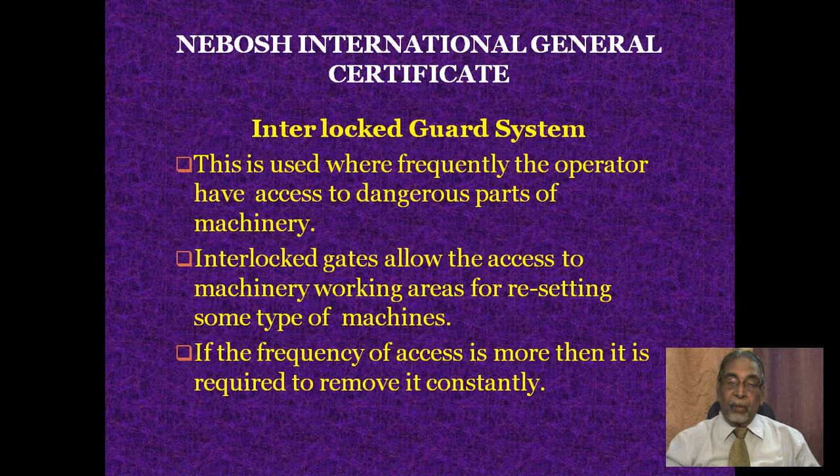Another type of guard is the interlock guard system. This is used where the operator frequently has access to dangerous parts of a machinery. Interlocked gates allow access to machinery working areas for resetting some type of machines. If the frequency of access is more, then it is required to remove it constantly.

Interlocking guard system consists of a secure safety system. This links the primary guard opening to the opening of a second safety device, or to the complete stoppage of the machine. These are the safest devices by which safe working access is allowed to the machine operations. This system works as the best protection system.

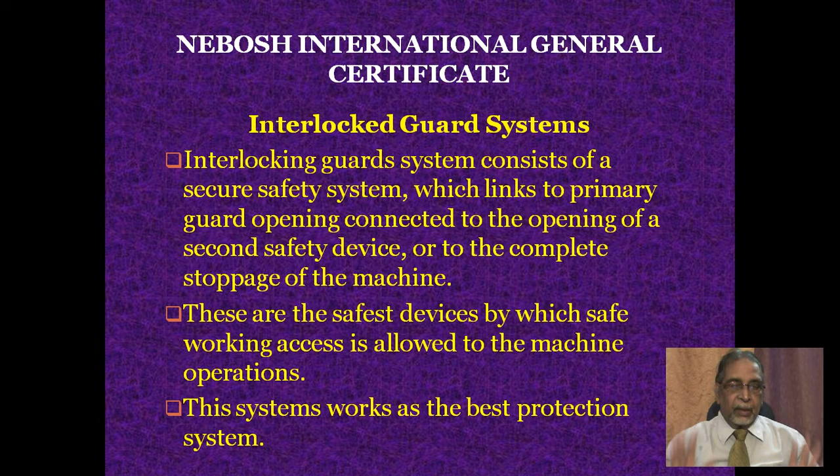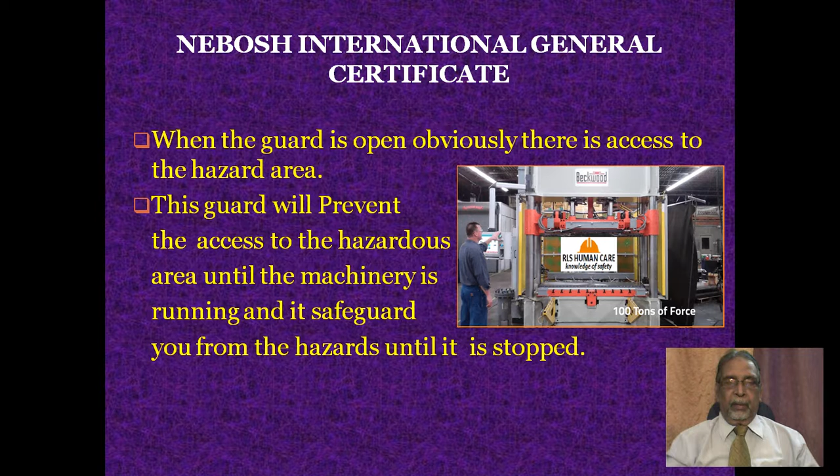When the guard is open, obviously there is access to the hazard area. You can see the diagram of the interlock system with the machine. This guard will prevent access to the hazard area until the machinery is running, and it safeguards you from the hazard until it is stopped.

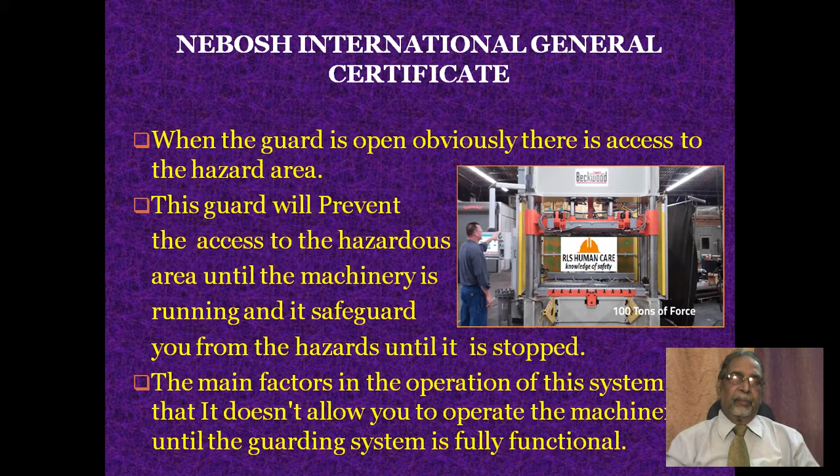The main factor in the operation of this system is that it doesn't allow you to operate the machine until the guard system is fully functional. In the event the interlock system fails, the machinery gets shut off, but the guard remains in place and the hazard also remains in its place. But nobody is going to get harmed.

The interlocking system is very difficult to fail. The interlock system operates by linking to the power supply of the machine. You can only remove this interlock by cutting it off, with the guard in open position.

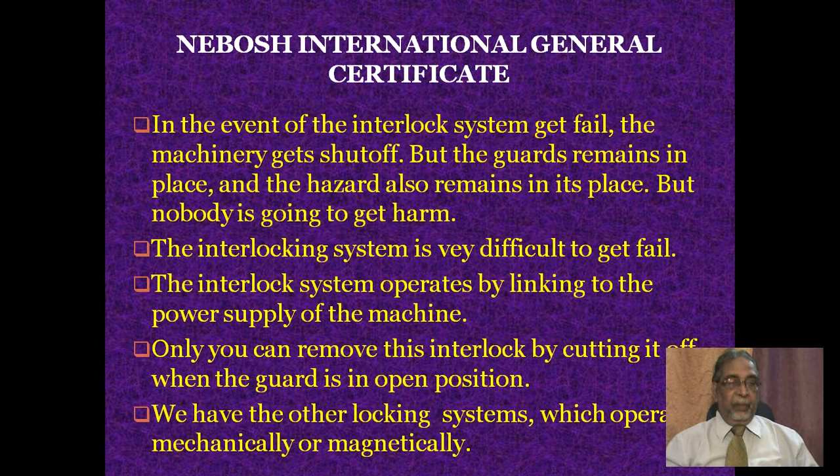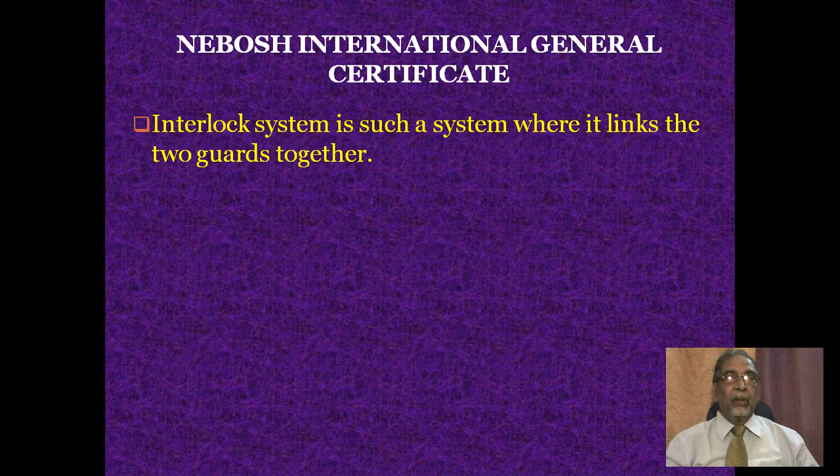We have another locking system which operates mechanically or magnetically. The interlock system is such a system where it links two guards together. The opening of the first guard must automatically bring the second guard into operation.

When you need access to replace a workpiece in the machine, the action of opening the guard will stop the cutting operation and slide the cutter back away from the cutting access area, and a second guard will cover it. The primary guard never opens until the second safety guard device is in its exact place.

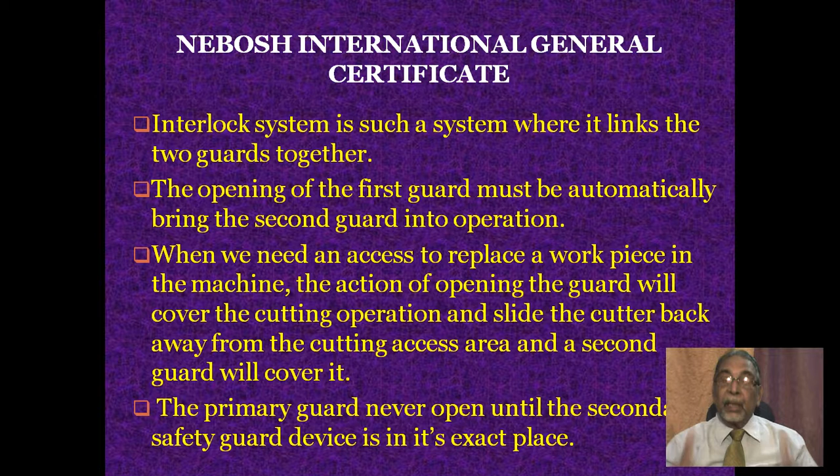Trip devices. Now we will see the different types of trip devices. There are some operations which make it impossible to fit either a fixed guard or an interlock.

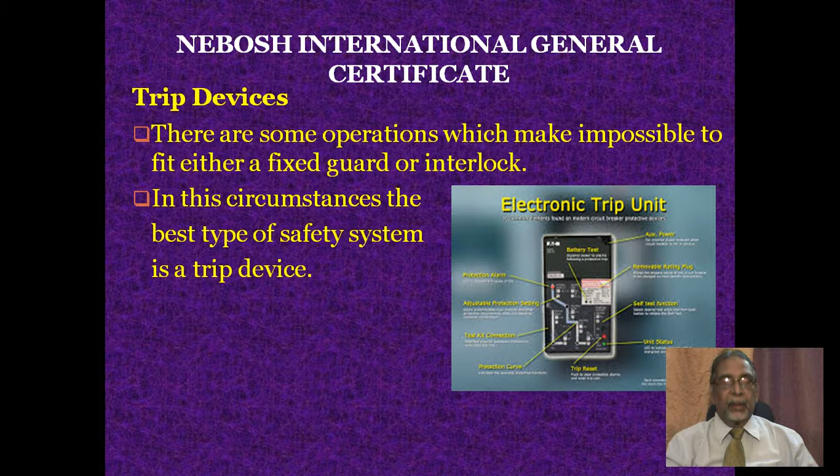You are seeing a diagram of the electronic trip unit. In these circumstances, the best type of safety system is a trip device. It is defined as a guard which stops or reverses the motion of the machine when a person enters the hazard area.

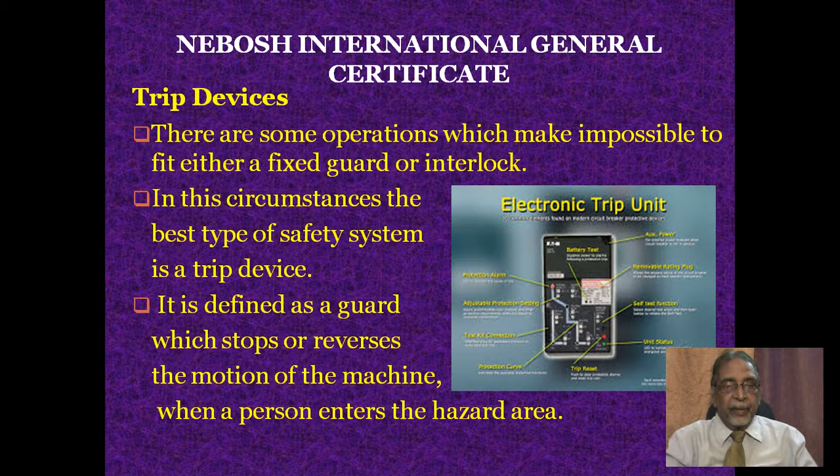The trip device gets operated when a person enters the risk area, or if an entanglement occurs into the moving parts. The effectiveness of any trip device depends on the efficiency of the stopping device. So these devices are considered top priority.

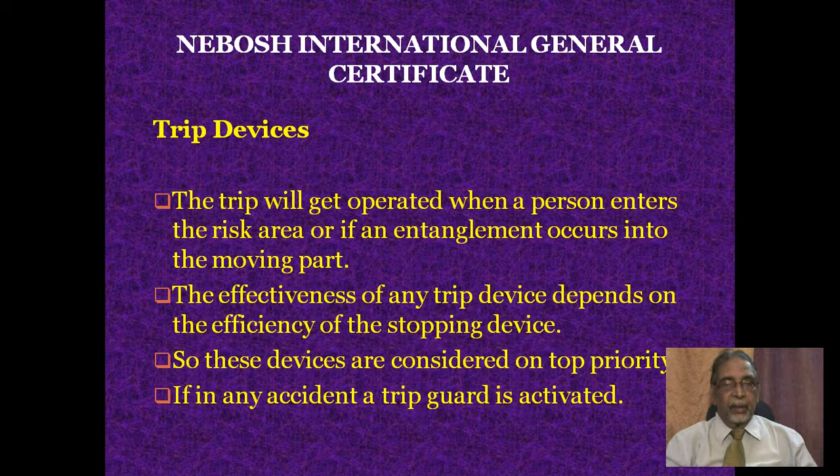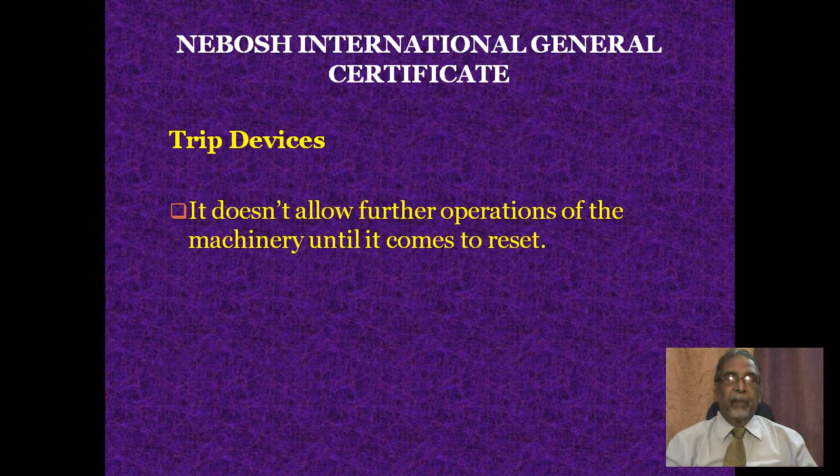If in any accident a trip guard is activated, the trip device doesn't allow further operation of the machinery until it comes to rest. It is important that a test circuit should be designed to inspect the tripping action of the machine.

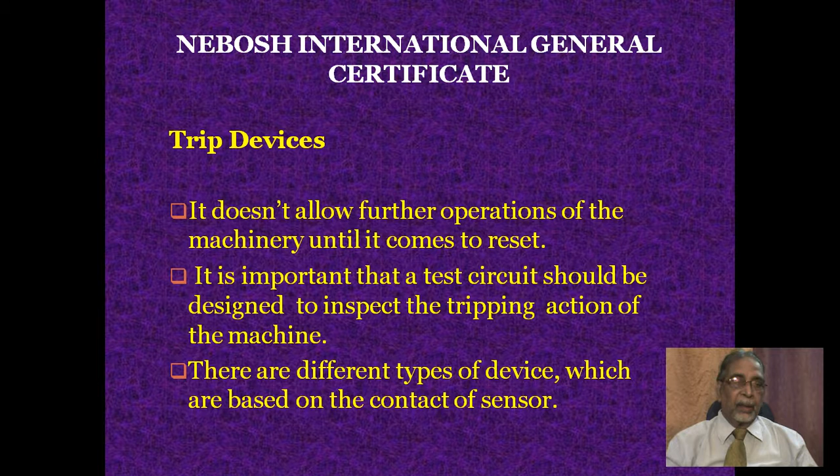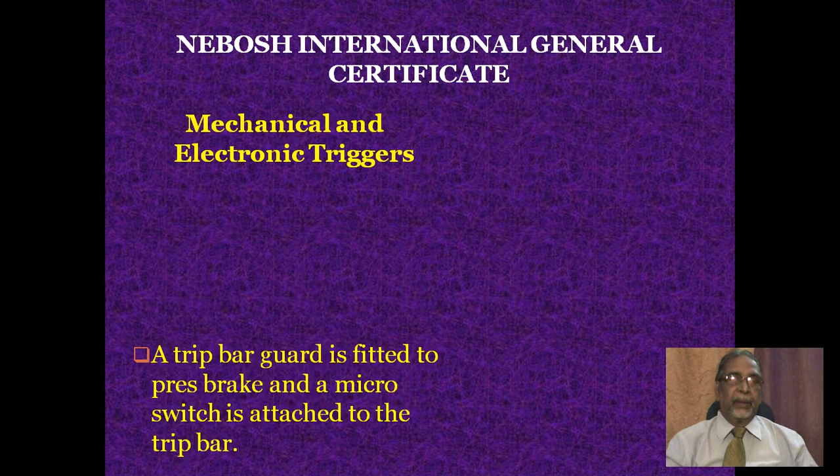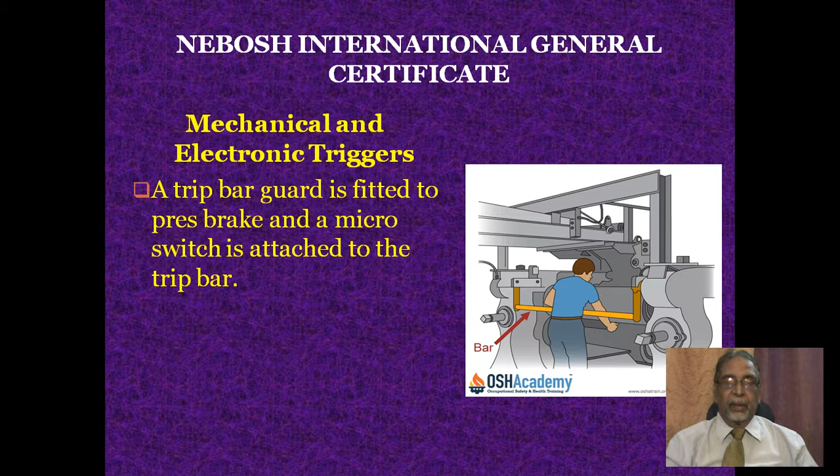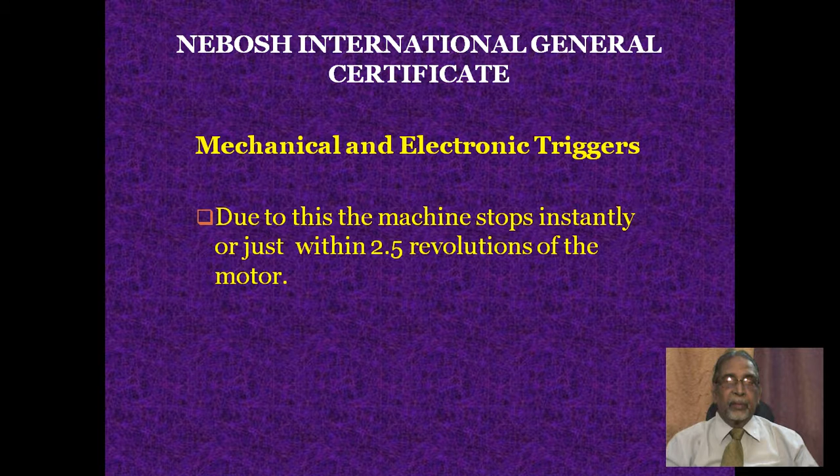If it is slightly displaced, the alternating current supply gets cut off and direct current is injected into the motor. Due to this action of displacement from AC to DC, the machine stops instantly, within 2.5 revolutions of the motor. If a person gets entangled in the machine, the trip bar is displaced and the power to the machine gets cut off.

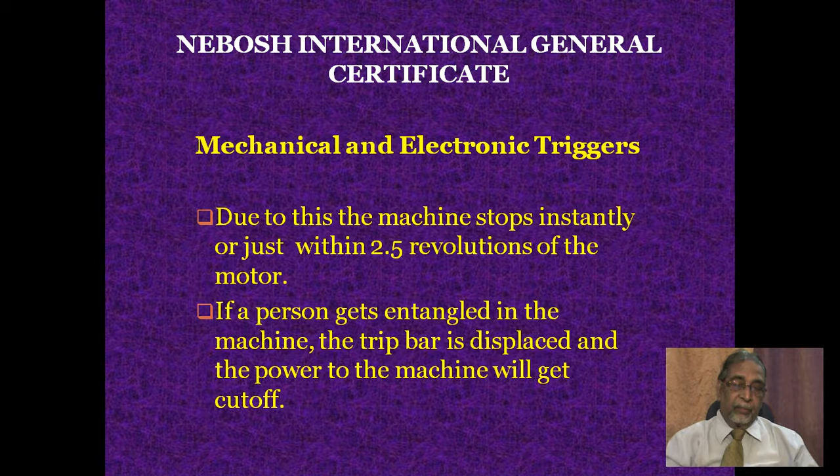This type of device may not prevent contact, but only operates once a contact is made. But this serves to reduce the injurious effect of contact.

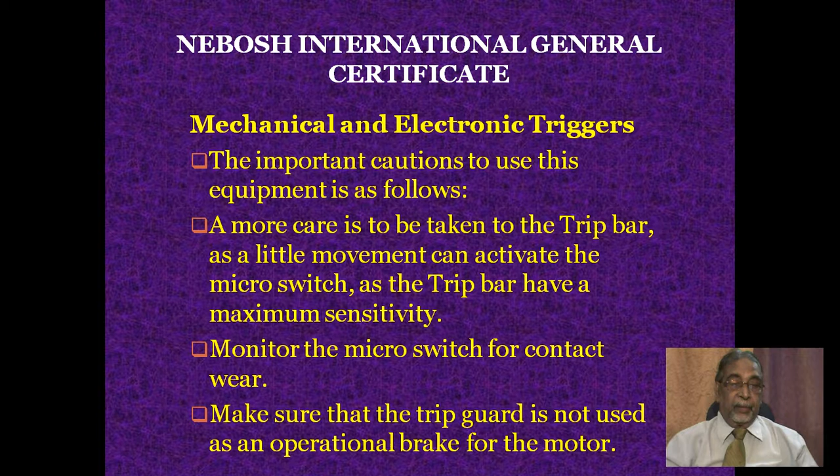The important cautions to use this equipment are as follows. More care is to be taken with the trip bar, as a little movement can activate the micro switch. The trip bar has maximum sensitivity. Monitor the micro switch for contact wear. Make sure the trip guard is not used as an operational brake for the motor.

Photoelectric guards. These are used for press brakes, guillotines and hydraulic presses. You are seeing a photograph of a press attached with a photoelectric guard. The guard is operated by creating a curtain of light rays across the hazard area.

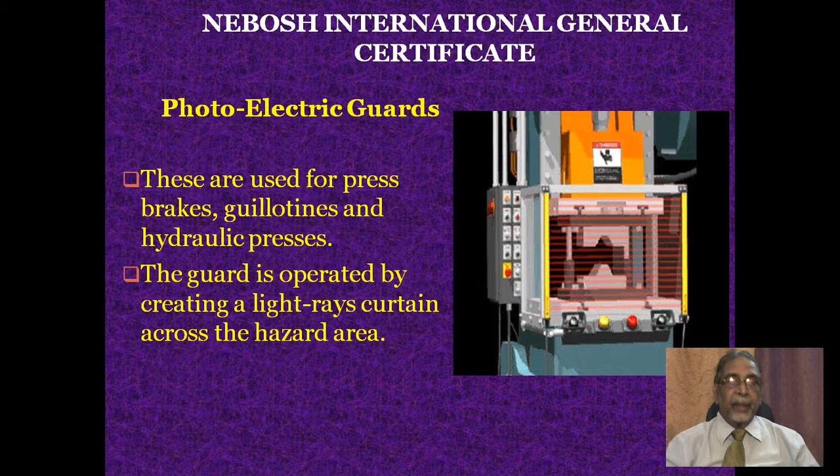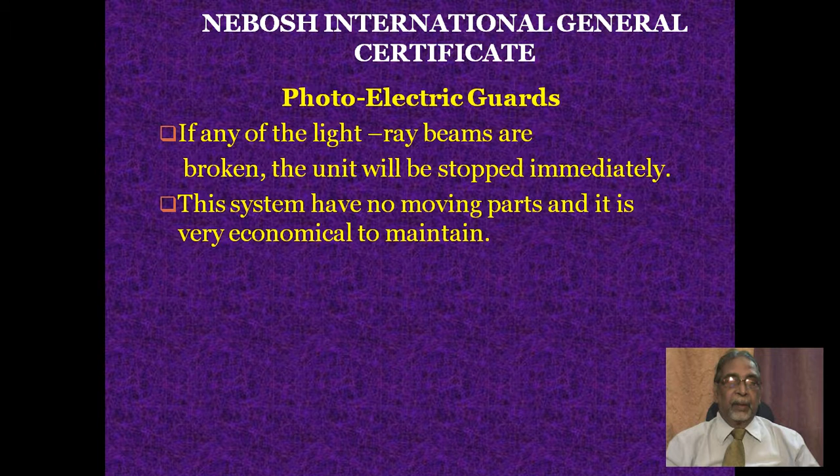If any of the light ray beams are broken or disturbed, the unit will stop immediately. The system has no moving parts and is very economical to maintain. The light screen is incorporated into a self-checking system after each operation of the machine, confirming that the equipment is working in good condition with no possibility of failure.

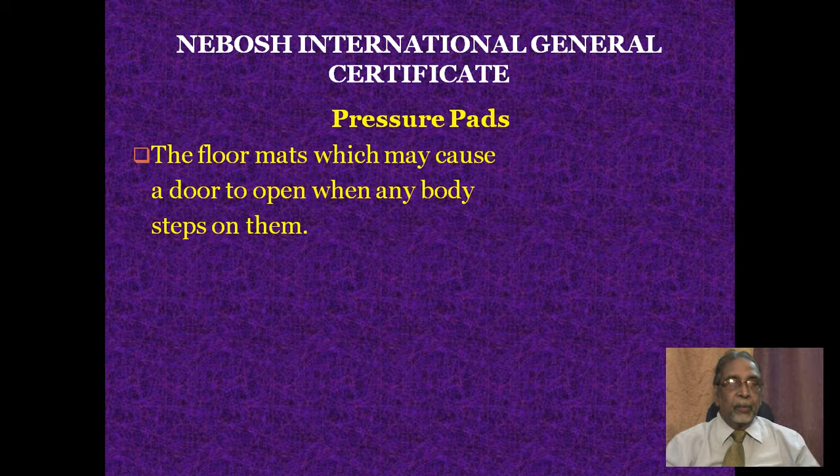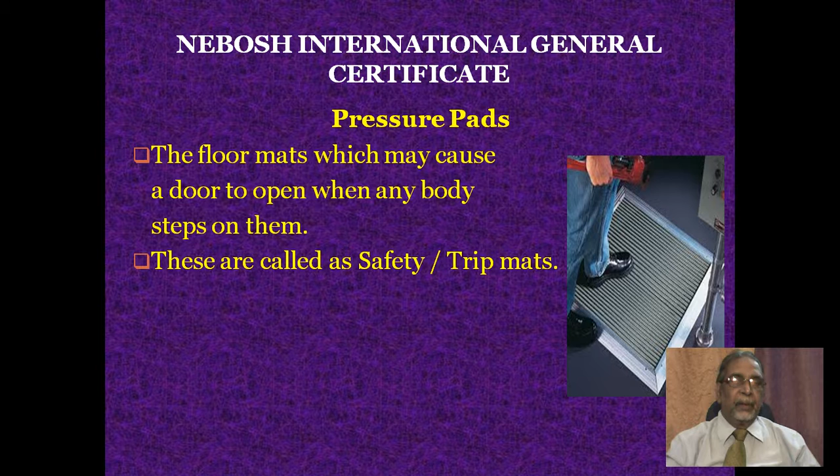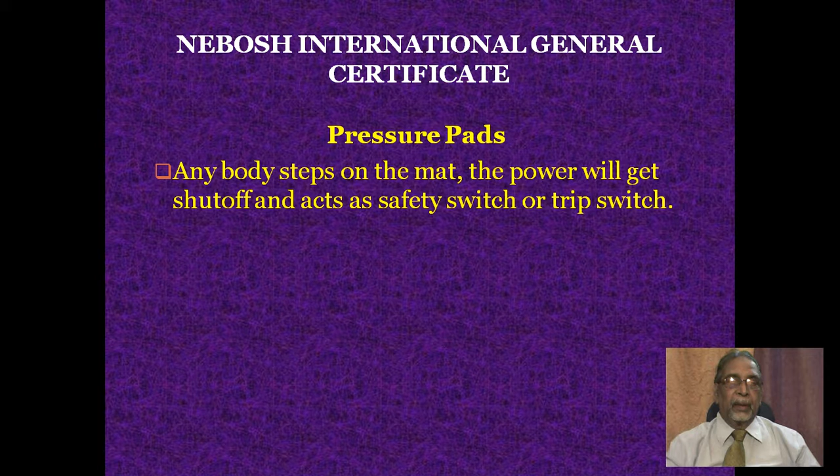This is another device called pressure pads, or floor mats, which may cause a door to open when anybody steps on them. You are seeing a photograph of a pressure pad at the right side. These are called safety or trip mats. They consist of pneumatic or low voltage electric contact circuits linked to the power circuit of the machine. When anybody steps on the mat, the power gets shut off, acting as a safety switch or trip switch.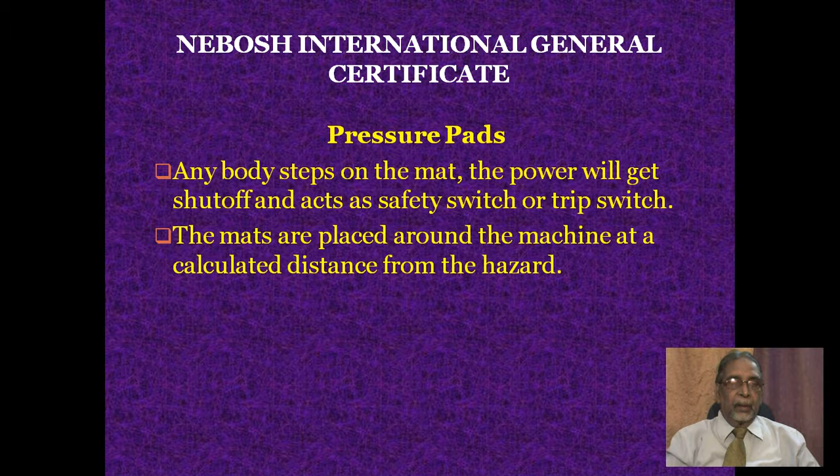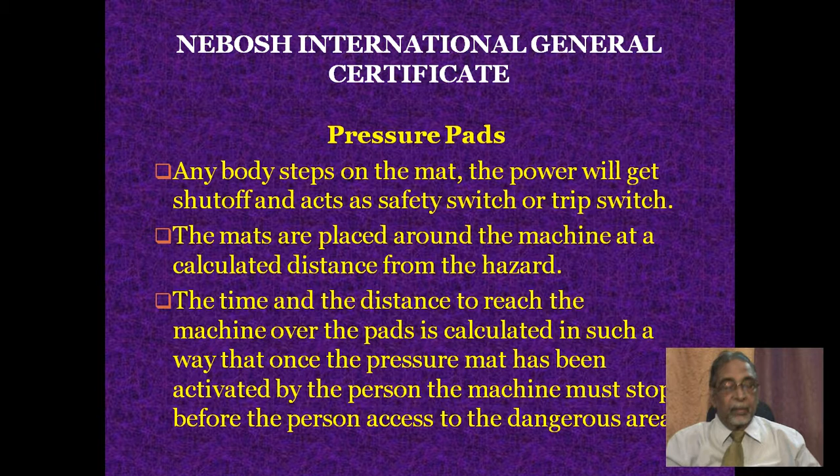The mats are placed around the machine at a calculated distance from the hazard. The time and distance to reach the machine over the pads is calculated so that once the pressure mat has been activated by the person, the machine must stop before the person accesses the dangerous area. The same principle is used in devices like safety edges and narrow strips fitted to sliding doors or machine parts which may close to trap a person. Circuits from the pressure strips can halt the closing movement or reverse it.

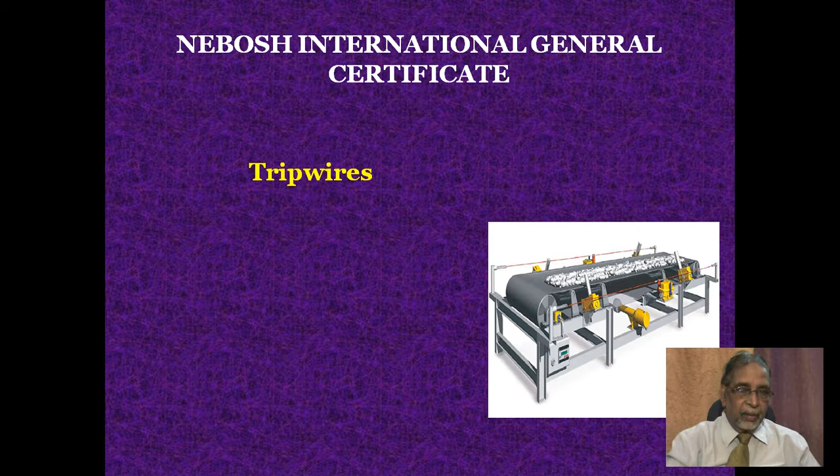Tripwires. This is another type of device used for safety. You are seeing a diagram at the right side where you can see a tripwire has been attached to a switch. Tripwires are more convenient to stop long conveyor belts, rope making and printing machines, and paper making machines.

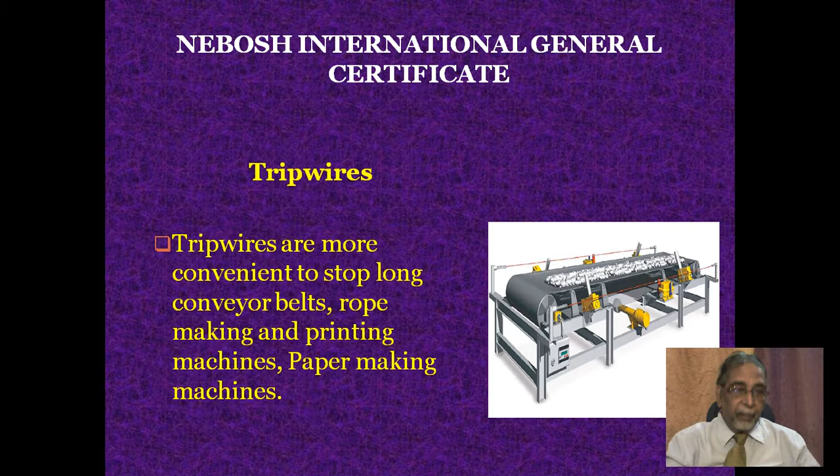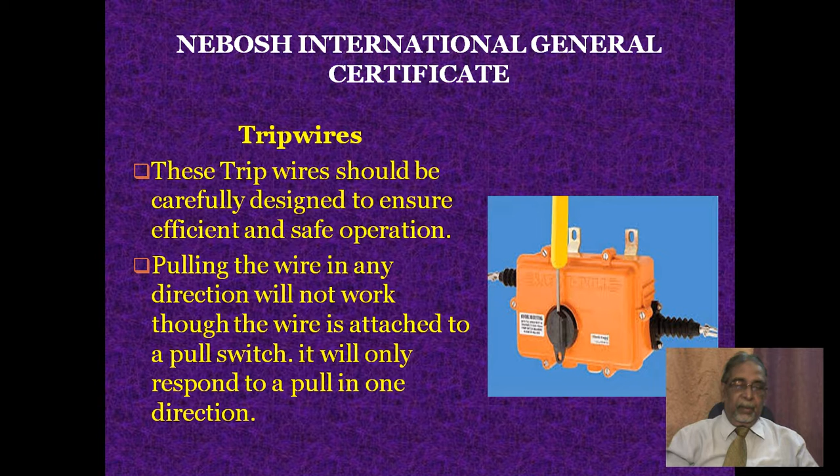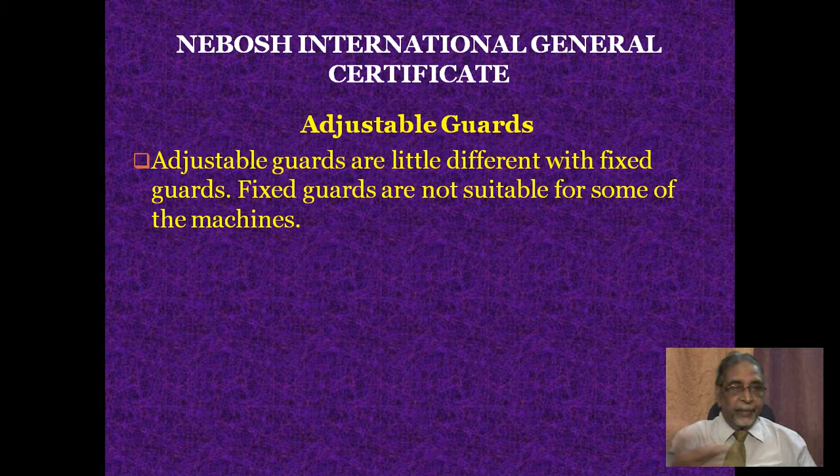Now we will go through adjustable guards. Adjustable guards are a little different from fixed guards. Fixed guards are not suitable for some machines, so as per the design of some machines, only adjustable guards are suitable. Otherwise, it is impracticable to prevent access to the dangerous parts. The cutter on a milling machine and the abrasive wheel on a surface grinder will have adjustable guards.

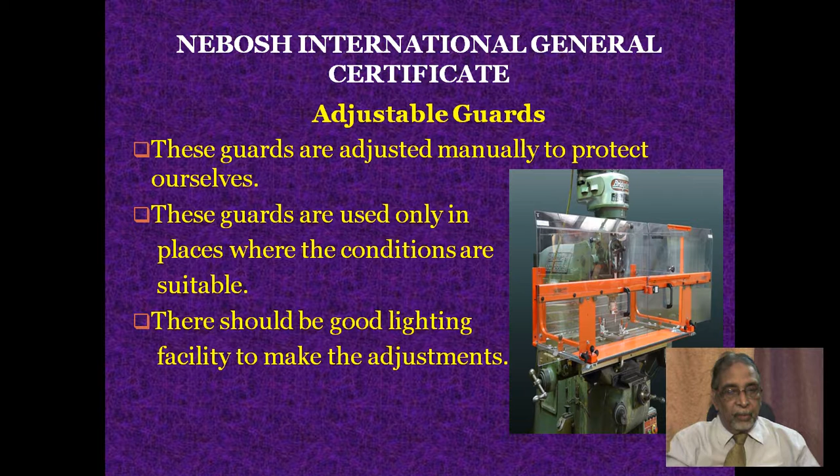These guards are adjusted manually to protect ourselves. You are seeing a photograph of a milling machine with an adjustable guard. These guards are used only in places where the conditions are suitable. There should be good lighting facility to make the adjustments, and adequate training should be given to the machine operator to work safely.

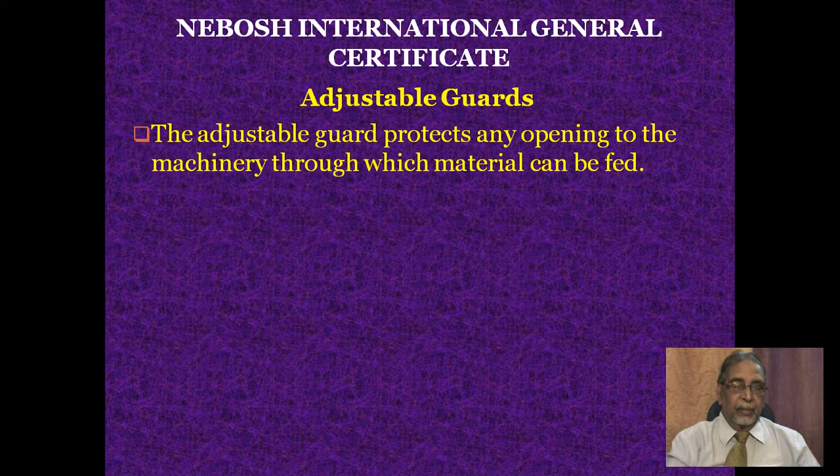The adjustable guard protects any opening to the machinery through which material can be fed. This opening can be adjusted to open and close as per our requirement size and as per the requirement of the job.

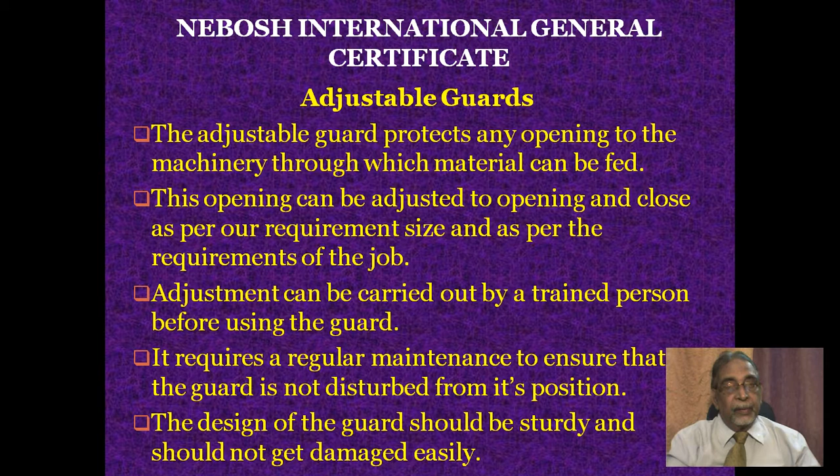Adjustment can be carried out by a trained person before using the guard. It requires regular maintenance to ensure that the guard is not disturbed from its position. The design of the guard should be sturdy and should not get damaged easily. Generally, these types of guards are used on woodworking machinery, lathes, milling machines, drills and grinders.

Machine operators prefer to have a clear view of the job during machine operations. Viewing windows of polycarbonate, perspex, or armored plate glasses are fixed to allow the operator's clear view. Some systems are made with telescopic fencing or a slotted movable casing to allow the view of the operator.

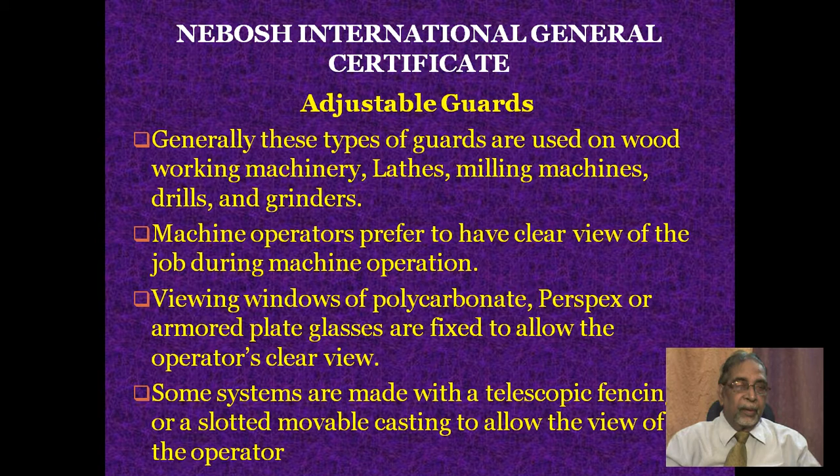This is a radial circular saw with adjustable guard. The cover is adjusted so that the height is large enough for the workpiece to be cut by the saw, while at the same time ensuring minimum exposure to the dangerous parts.

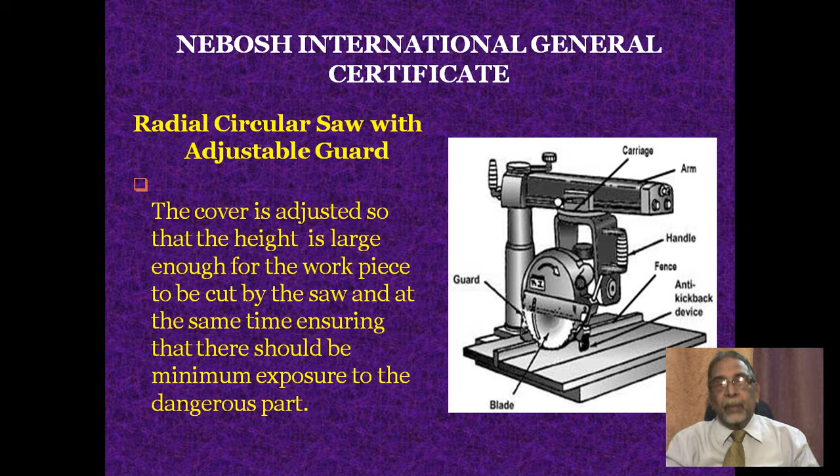This is a hinged lathe guard. A visible transparent cover over the cutting operations area allows the operator to view and control the operations. It is hinged at the top so that on completion of the operations, it can be lifted to get access to the workpiece.

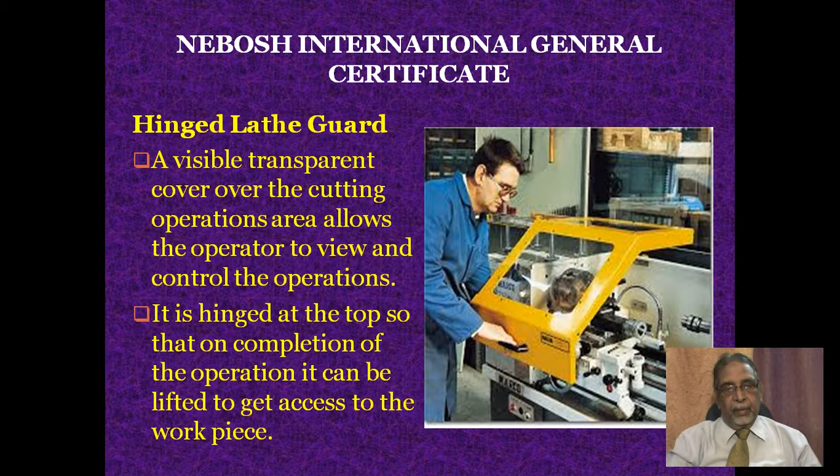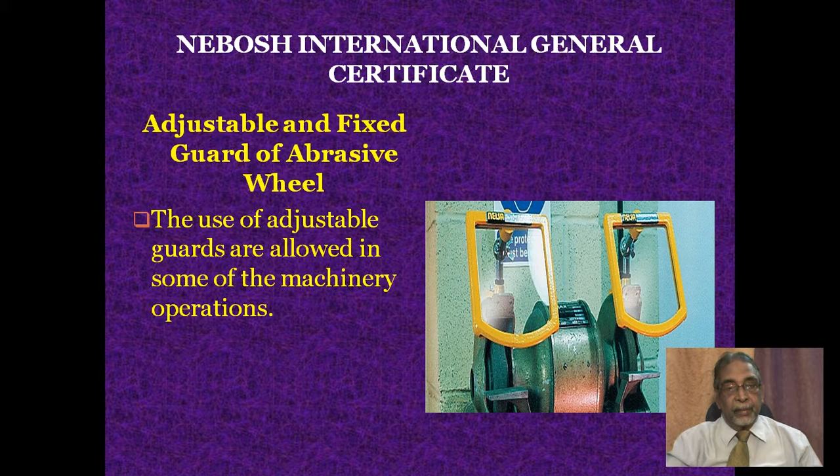This is an adjustable and fixed guard of an abrasive wheel. The use of adjustable guards is allowed in some machinery operations. The guards are adjusted by the operator but not automatically.

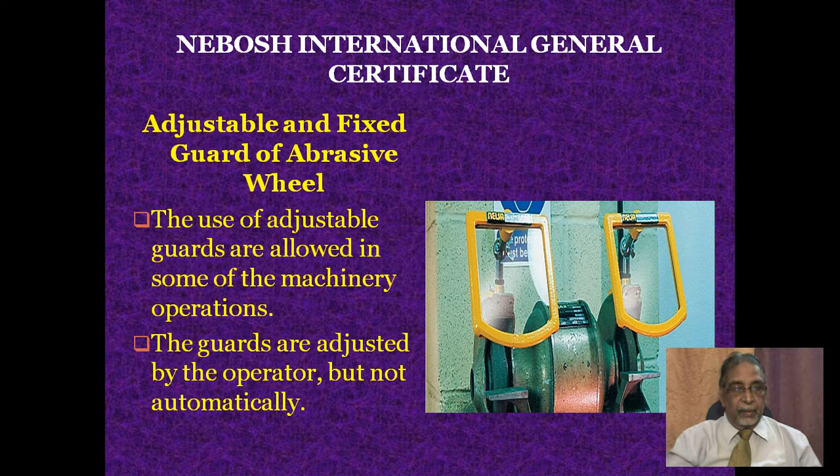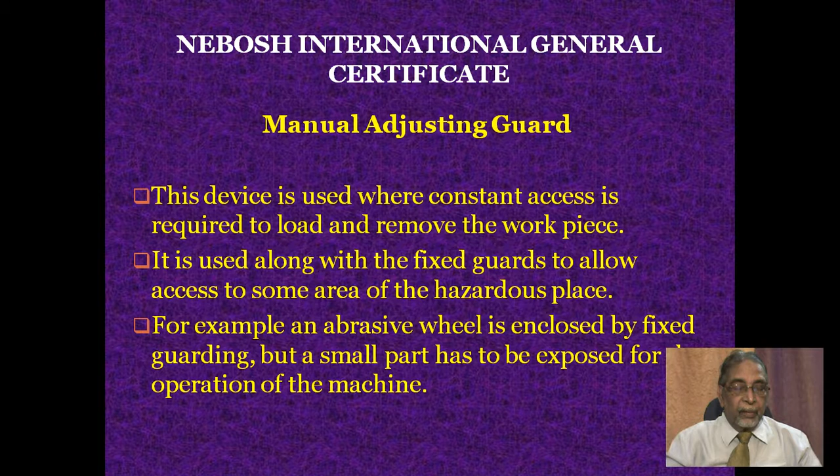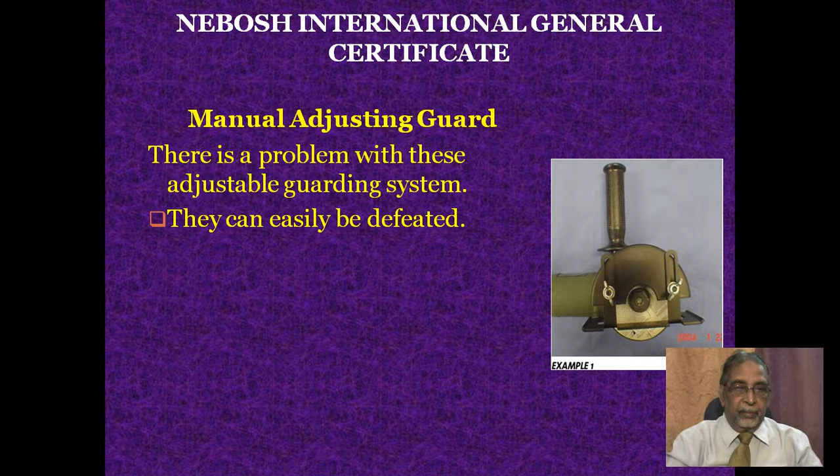There is a problem with the manual adjusting guards system. You can see a photograph of a grinding machine attached with an adjustable guard system. They can easily be defeated, as they depend upon the operator only. The operator should take more care about safety for himself and should be vigilant at all times while operating the machine.

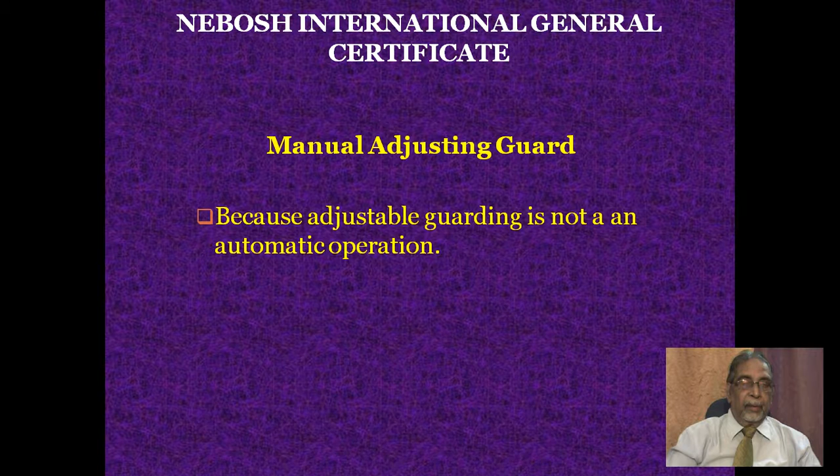Manual adjusting guard system is not an automatic operation system. A perfect suitable training should be given to the operator, and there should be strict supervision on him.

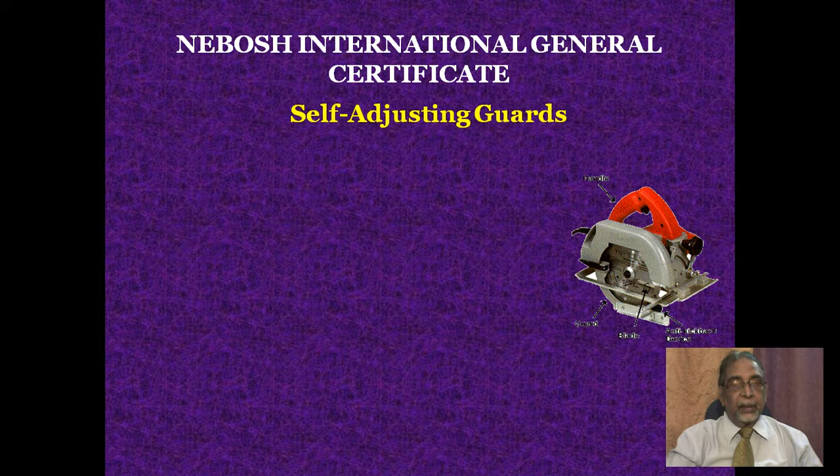This is a self-adjusting guard system. A self-adjusting guard gets adjusted itself to accommodate the passage of the material and control the sparks and broken material particles from striking the operator. At the beginning, the guard is open to accommodate the workpiece in position and adjusted to the safe closed position. After completion of the operation, it returns to the safe position.

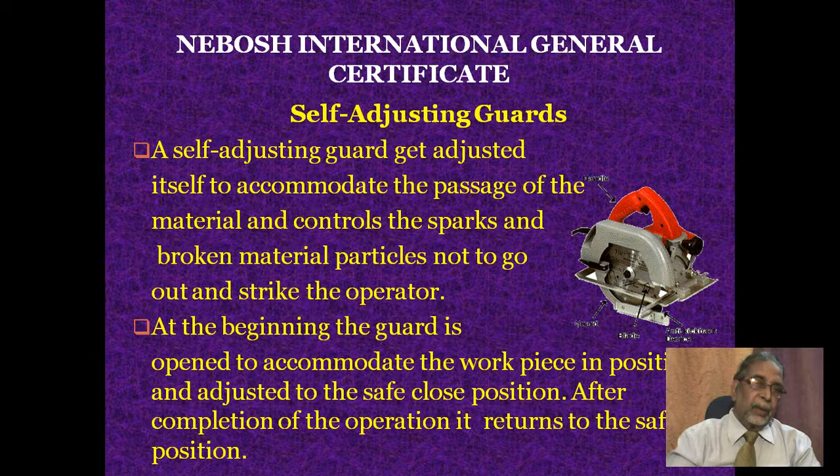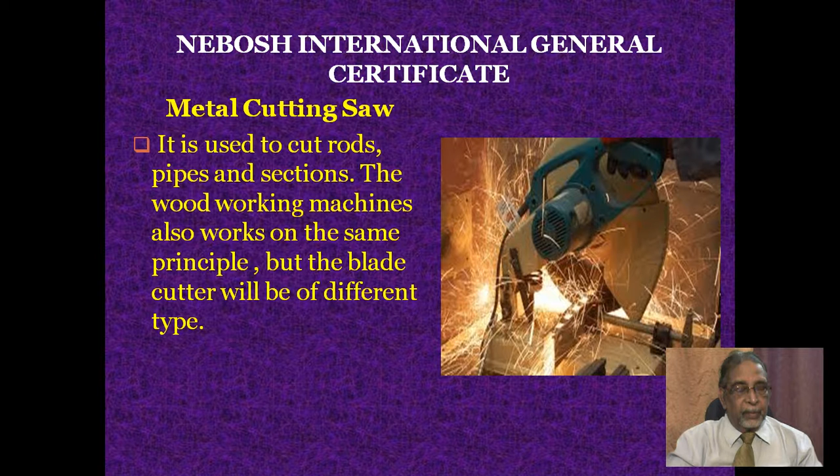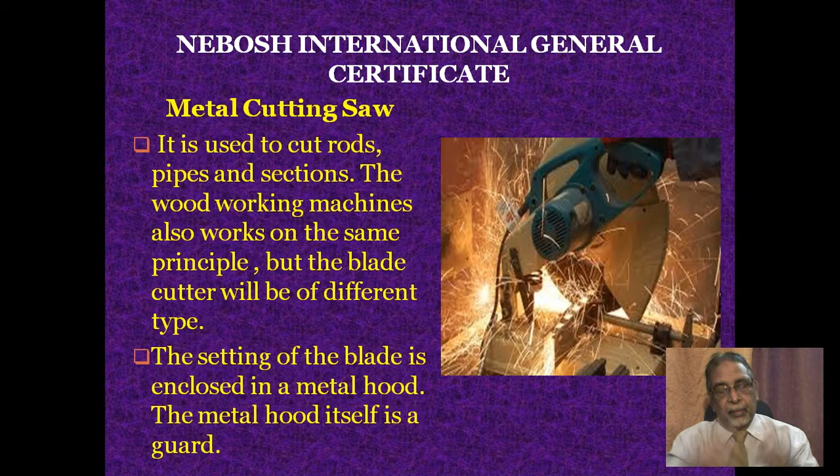This is a metal cutting saw. You can see the photograph of a metal cutting saw in action. It is used to cut rods, pipes and sections. The woodworking machine also works on the same principle, but the blade cutter will be of a different material type. The setting of the blade is enclosed in a metal hood. The metal hood itself is a guard. The blade and hood are fixed to an arm.

We can observe that no part of the blade is exposed because the self-adjusting guard is attached with a spring, which goes up by closing the job in the cutting position and comes down when we lift the blade.

Some of the machines have guards which come down and close the job during the cutting operation. This is due to gravity pressure. When the arm is pressed down for the cutting operation, first the guard comes in contact with the table of the machine or the job, and slowly as the blade moves down, the guard will also move to the up position.

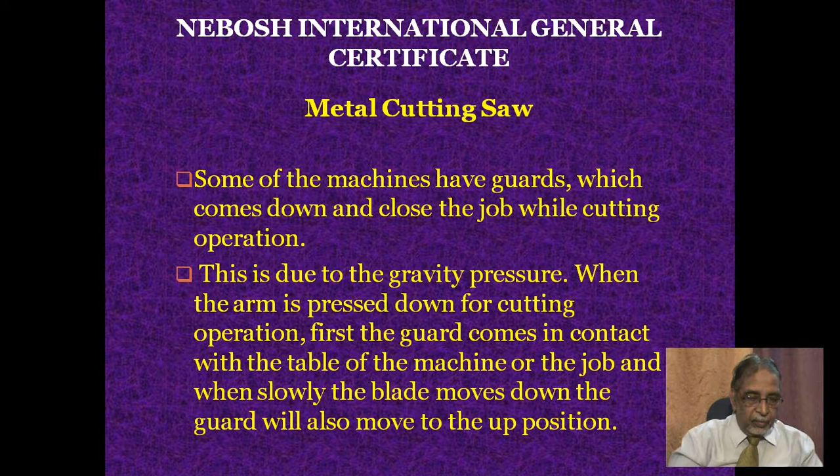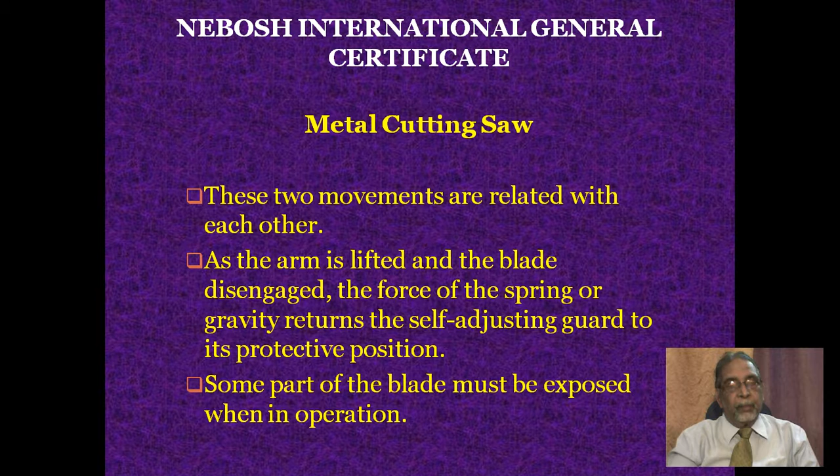These two movements are related with each other. Now the arm is lifted and the blade disengages. The force of the spring or gravity returns the self-adjusting guard to its protective position. Some part of the blade must be exposed when in operation.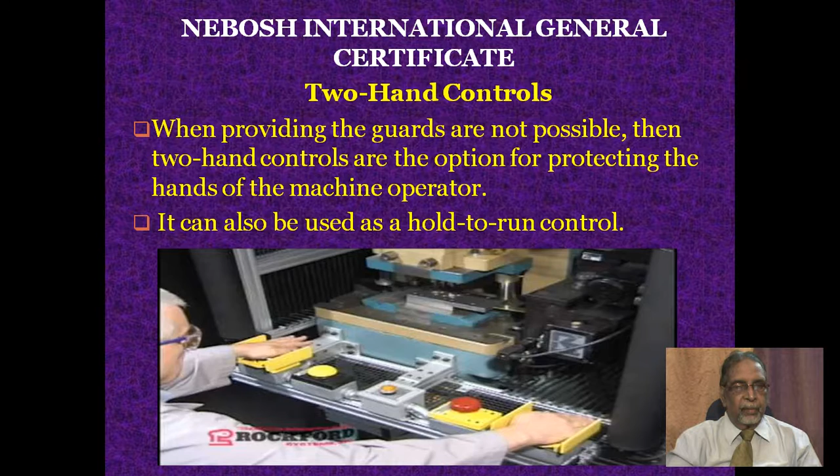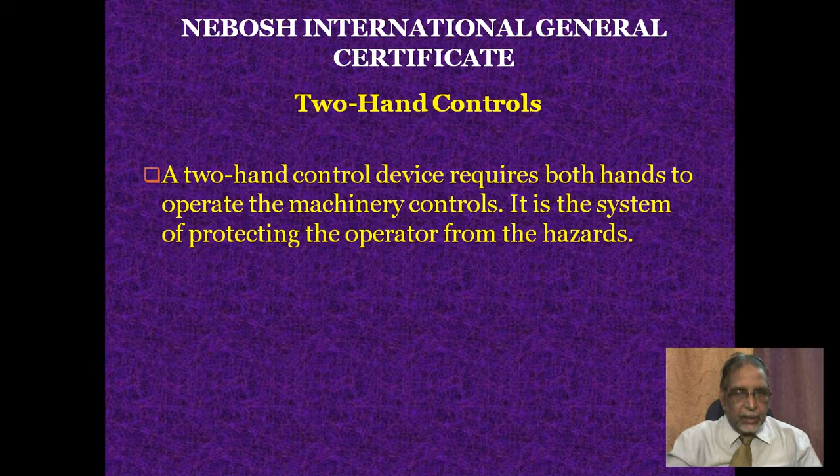A two-hand control device requires both hands to operate the machinery controls. It's a system of protecting the operator from hazards. This is a special type of design where hand controls should be placed and separated. It's only possible to set the dangerous parts in motion if the controls are operated within an approximate time of half a second of each other.

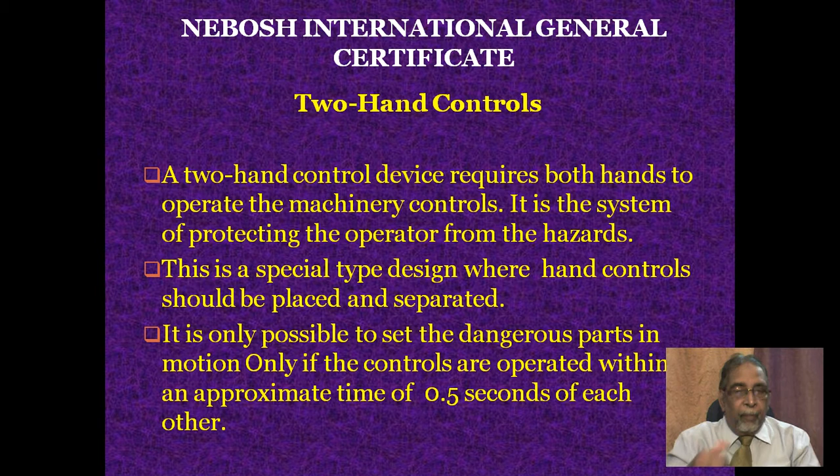If there is a danger from the movements of the parts, this should be stopped immediately or reversed. If there is still danger, one or both the controls are released. On releasing the control, the hand control should be installed at such a distance from the danger point that it should not be possible for the operator to reach the danger point before the motion of the dangerous part is stopped.

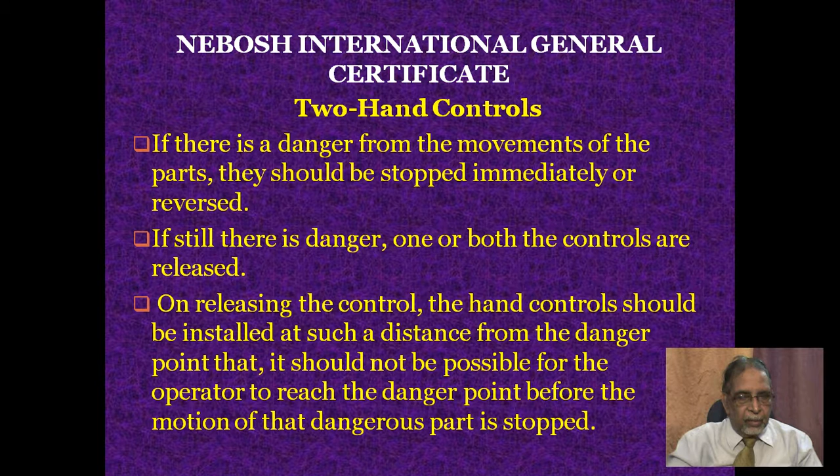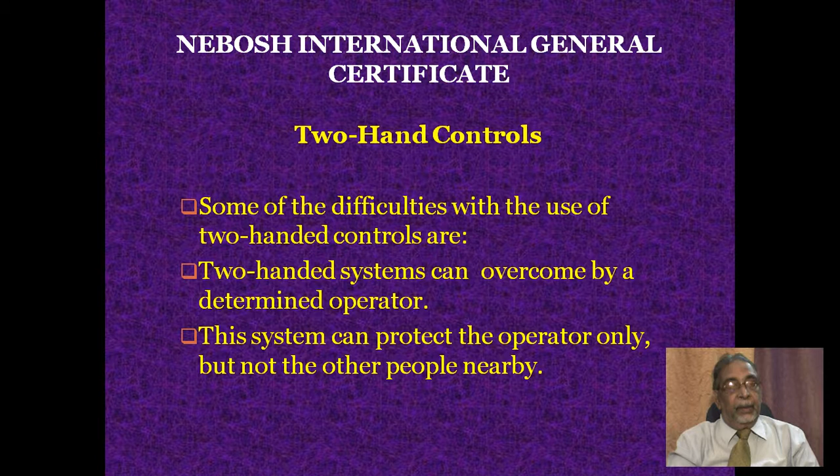Some of the difficulties with the use of two-hand controls are: the two-handed system can be overcome by a determined operator. This system can protect the operator only, but not other people nearby. So frequent maintenance is required for this two-hand control system. This system requires a complex mechanism if we want the machine to be more effective. In practice, this system of machine guarding is used very rarely in industry.

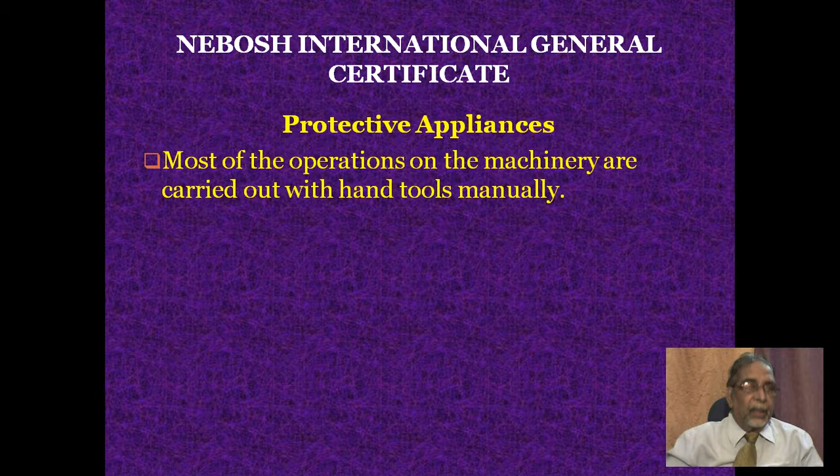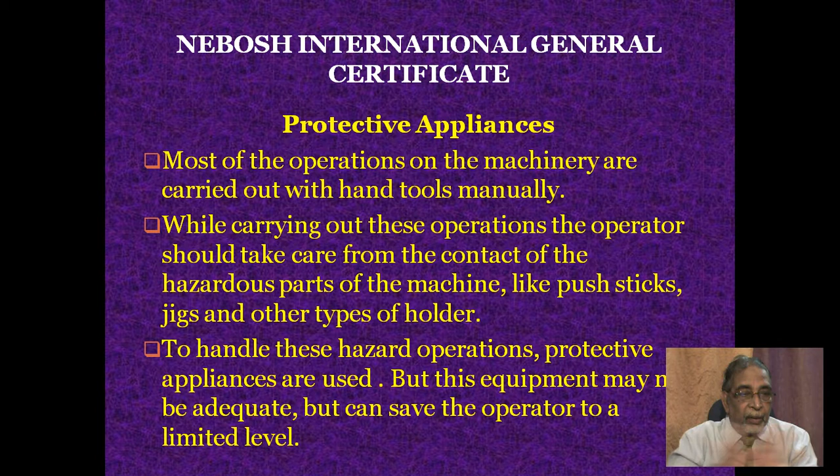Protective appliances. Most of the operations of the machinery are carried out with hand tools manually. While carrying out these operations, the operator should take care to avoid contact with the hazardous parts of the machine, using push sticks, jigs and other types of holders. To handle these hazardous operations, protective appliances are used, but this equipment may not be adequate and can save the operator only to a limited level.

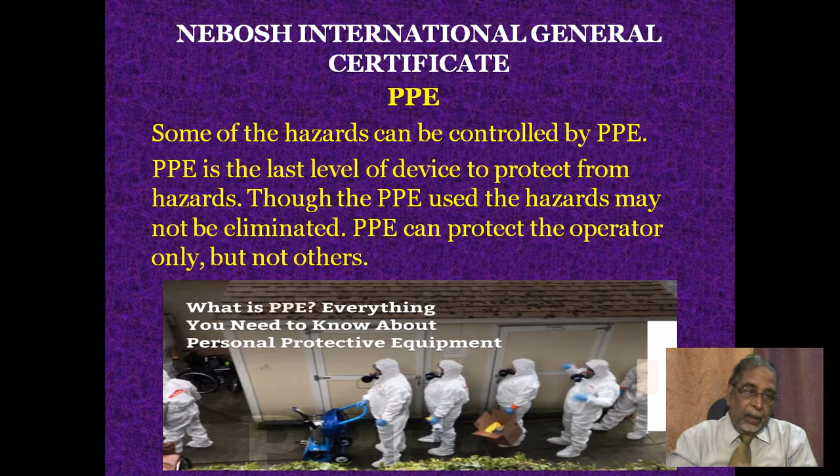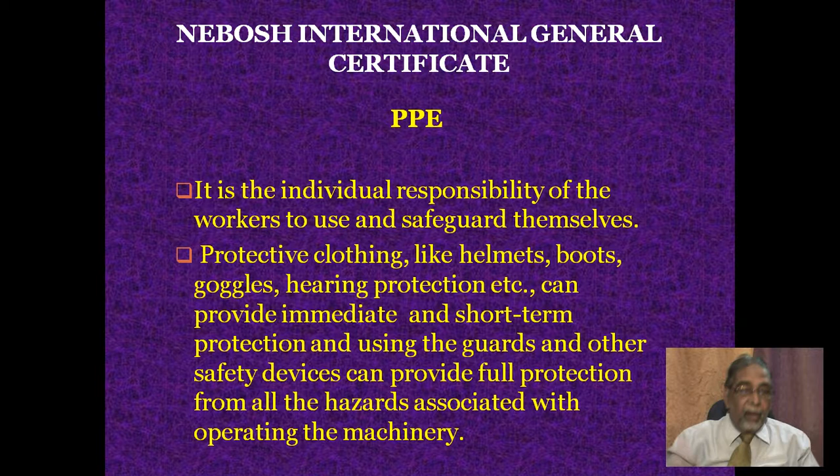It's the individual responsibility of the workers to use and safeguard themselves. Protective clothing like helmets, boots, goggles, hearing protection, etc. can provide immediate and short-term protection, while using guards and other safety devices can provide full protection from all the hazards associated with operating the machinery.

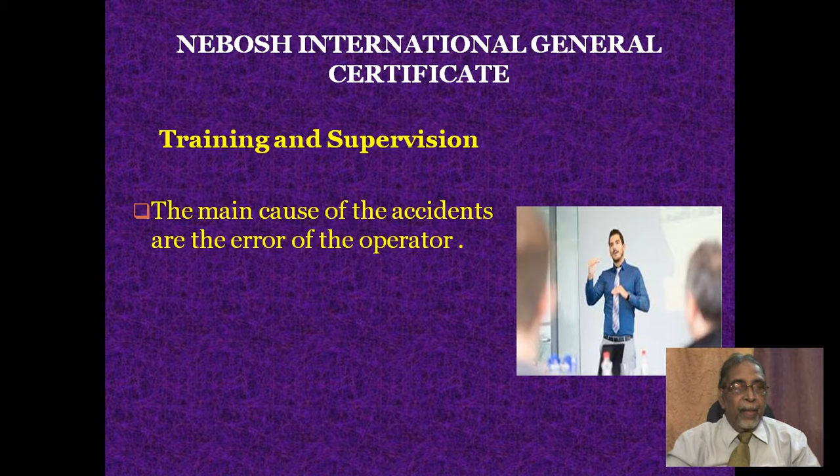Training and supervision. The main cause of accidents is operator error. All the workers should be fully aware of the particular risks associated with the operation of the particular machine, and they should know how to work safely.

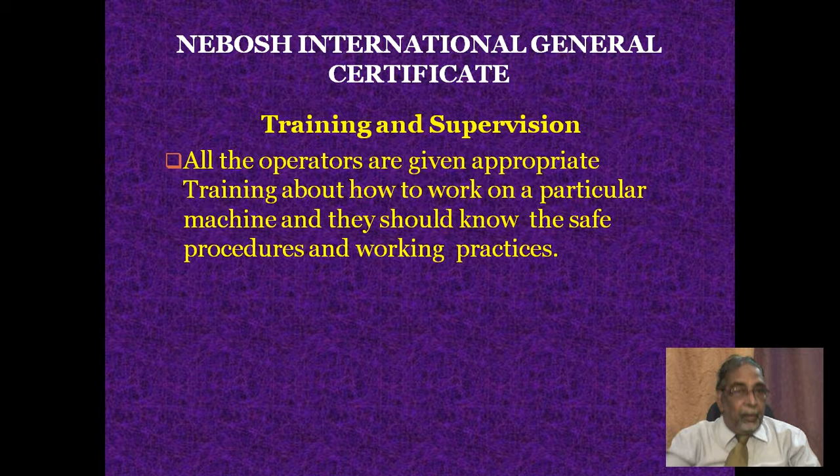All operators are given appropriate training about how to work on a particular machine, and they should know the safe procedures and working practices. The level of training will be related to the machinery and equipment they are working with and its associated hazards and dangers.

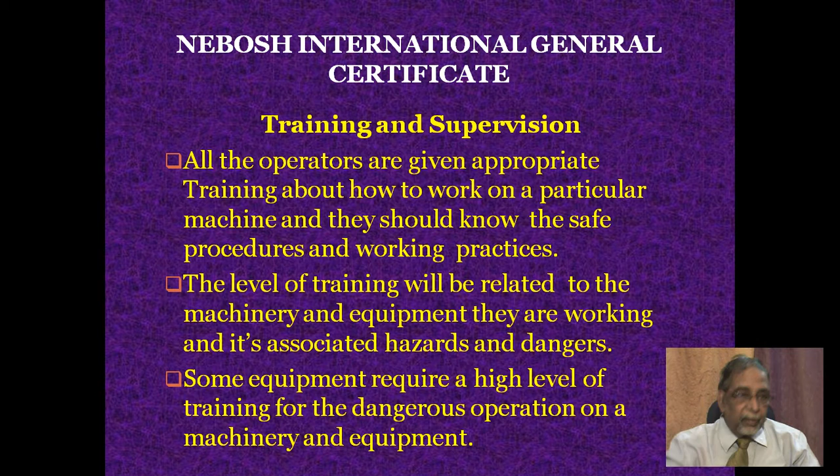Some equipment requires a high level of training for dangerous operations on the machinery and equipment. Some training programs will include recognized training certificates. Abrasive wheel mounters and setters will be trained through a specialized training program, and as recognition they will be awarded a certificate.

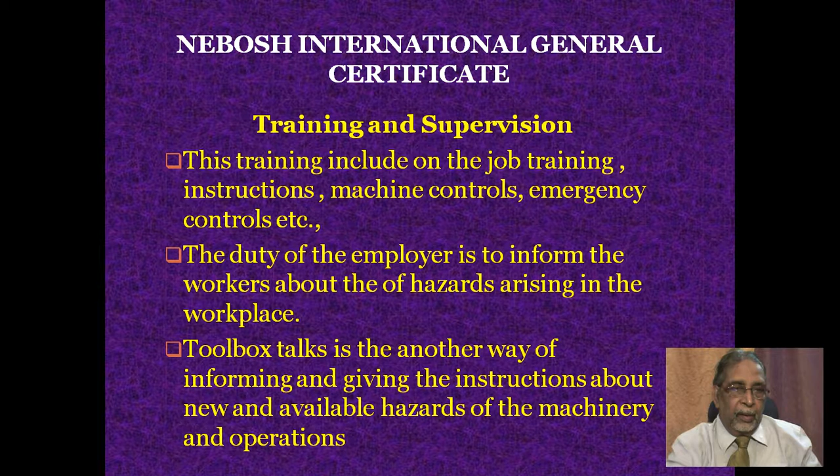This training includes on-the-job training, instructions, machine controls, emergency controls, etc. It is the duty of the employer to inform the workers about the hazards arising in the workplace. Toolbox talks are another way of informing and giving instructions about new and available hazards of the machinery and operations.